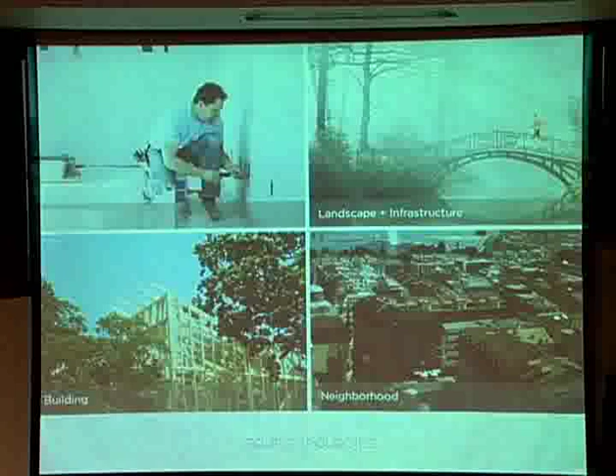Just like LEED, there are different versions of living buildings for different types of sites. Renovation is one - they encourage not just new buildings to go after this but renovations as well. Landscape and infrastructure, so not just buildings. New buildings, like what we're talking about tonight, and then neighborhoods as well. So they've got different allowances for different project types when necessary.

Beyond that, there are different zones, just like in LEED - different types of zones for this. There's natural habitat, rural agriculture, village or campus - it gets more urban as you go along. Depending on what type of project you are, you'll pick which zone you're actually in.

Another interesting part about the challenge - depending on the size of building you are, like in our case, we're a small school building next to a large church building that shades us most of the year, so we actually can't put solar panels on our little roof. We have to put it on the next building over because that's where the sun is. They allow you to scale jump to the next building if necessary to achieve net zero energy or water or any of the other petals.

So this is the first petal, which is site, and you'll see some similarities to LEED for those of you that know it. First of all, they want you to have limits to growth - it's obviously better to build on a gray field site or even a brown field site to reduce urban sprawl.

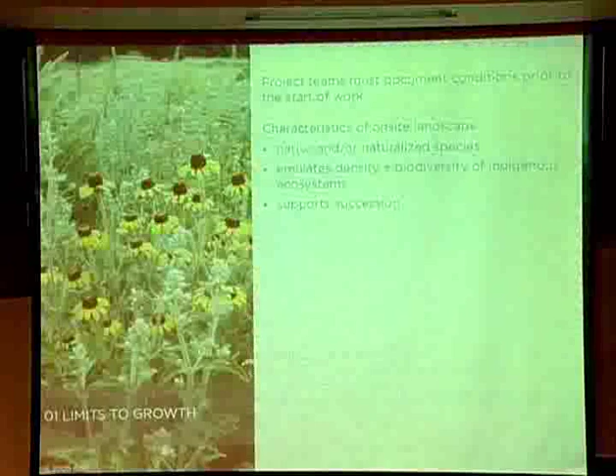Urban agriculture is one of the new credits for the 2.0, which is a really neat piece. A lot of up-and-coming sustainability people are talking about urban agriculture, which I know you guys do a lot of here in Missoula. It's great to see—certainly much better examples than we have in Seattle.

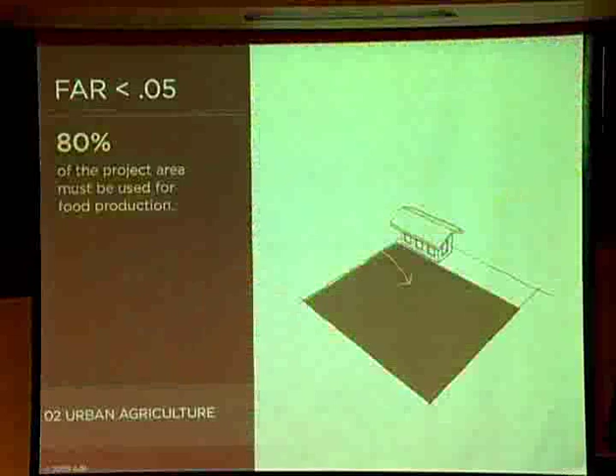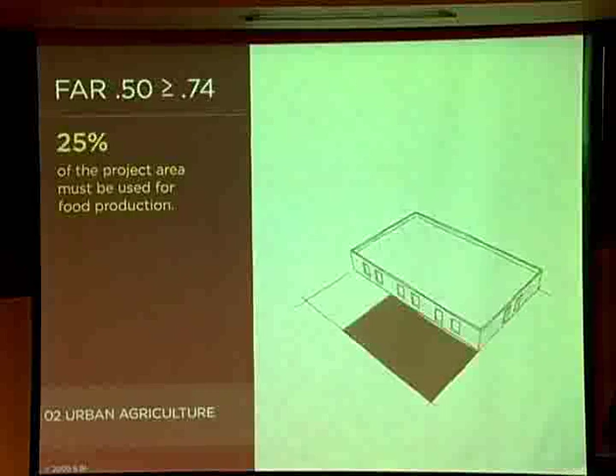For living buildings, they want each site to be able to produce its own food, based on the size of the building. As we click through some slides, you'll see it's based on your floor area ratio—the smaller the building, the more site you need for urban agriculture, and as your building gets bigger, you obviously have less space. So in urban zones, it's much harder to do.

But that's a nice piece to the challenge, taking on some sustainability aspects that LEED really doesn't touch on.

The third imperative under this petal is habitat exchange. Basically, for every hectare of land you build on, you have to offset that by protecting a hectare of land somewhere else—whether it's a wildlife preserve, native forest, or watershed. You're protecting the amount of land you're using in your project, which I think is unique and a nice feature of the challenge.

Another one is car-free living. This is basically promoting projects that are near public transportation, that promote pedestrian-friendly facades and streetscapes—just getting away from the need for the automobile.

They also will not allow you to have more parking than required by code, and if you can, they want you to change the code and actually reduce your parking—they want to see documentation that you've tried to do that.

This is one of the more exciting ones. The others are kind of familiar to you with LEED. This is the water petal, which is a fairly big one, has some difficulties in it, and it's actually a fairly simple piece to remember.

It's net zero water. That means all of the water used on your project has to be collected from rainwater—you're not allowed to use any city sources at all.

It also has another piece to it, ecological water flow—not only do you have to collect all of your water, but all the water used in the building has to be treated, and you can't really send it down the sewer to the city.

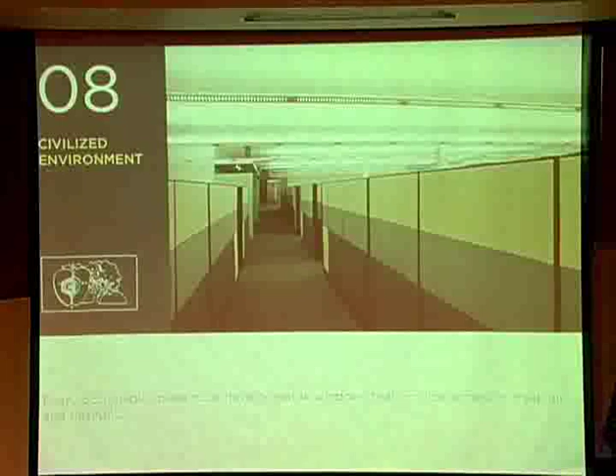Most projects in Europe trying to achieve this higher level of sustainability—almost everybody, for instance, in an office has access to an occupiable, or rather operable window, which can really change your productivity and your happiness and health at work or wherever you are.

Just to note, this is a bad example on the screen right now—it's not a good example. People look at that and say, that's not what we'd want to work in. So they're just showing you what not to do in this slide.

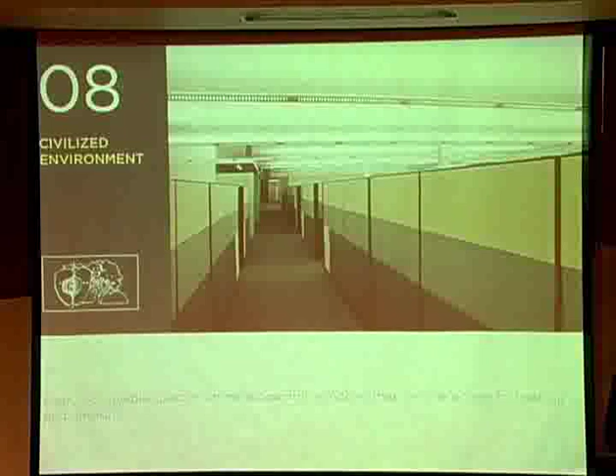So healthy air is another one too, where they're wanting you to promote indoor air quality. So this takes on things like having vestibules in your entry space, having walk-off mats, which is similar to LEED, and then also doing air quality testing.

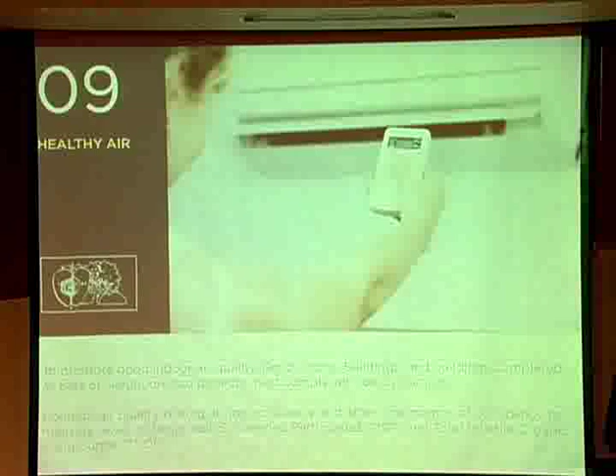Here's those things I just mentioned: meeting certain codes with ASHRAE systems, monitoring systems for carbon dioxide. So it's really similar to LEED with these portions here, they just go a little bit beyond.

This is another exciting one, I think, for us that we tried to embrace in our project. It's biophilia. That's where we're designing elements in the project to actually look back to nature for either their form or their function. That's something unique when you're trying to design a building, to think that way. So they give lots of examples of how you can do that: natural shapes and forms, trees and supports, animals, shells, eggs, sunlight, fire—just different things to think about in the design process to make your building more organic and respond more to nature.

So materials, this is a fairly interesting petal, and actually one of the more difficult things to challenge when you're first starting out on living buildings and learning about them. You think, oh, net zero energy, net zero water, that's really hard. How are we going to have buildings that do that? And what we found really, which we'll talk about later, is that it's fairly achievable. It's a goal that you can achieve yourself through engineering.

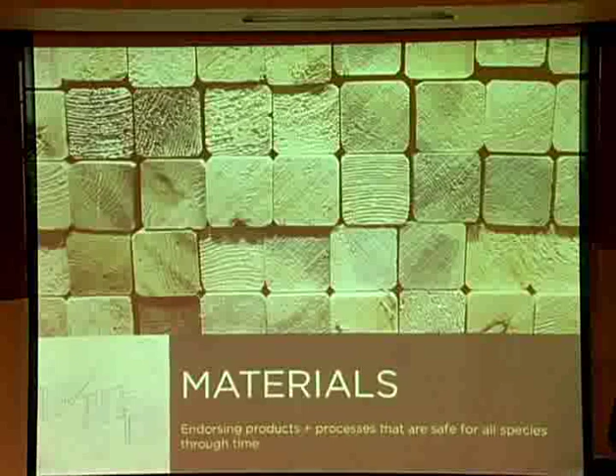So the team just kind of figures out the different strategies you're going to implement for that. Materials is quite a bit different because it's based on a lot of other people—it's based on the building industry, it's based on products, it's based on set standards for years and years in the world as we're trying to collect materials, and we'll kind of explain that here.

So the first part of the materials petal is the red list. I think this is a really great piece of the challenge here. The red list is basically this list of chemicals that you're not allowed to include in the building, and we will turn down the lights so you can see.

So this is the list. These are the things you can't include in the building, and you think maybe some of these are fairly easy. Lead, nobody's really adding that to buildings. But then you get into other things like PVC, for instance, and as you may know, PVC is basically in everything, and we'll kind of show you that later as well.

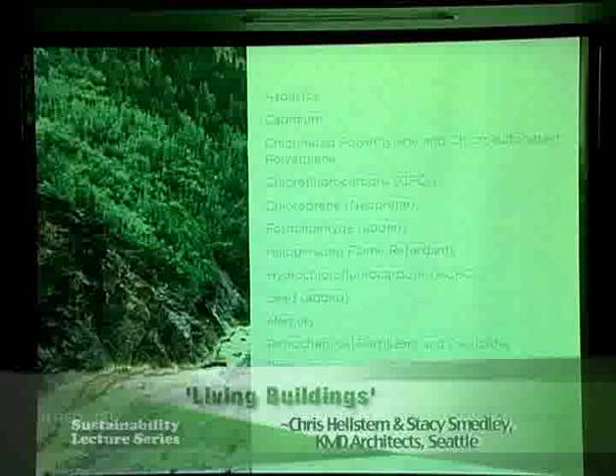It's just simple piping. Halogenated flame retardants sounds really fancy, but it's almost every kind of fireproofing that's in almost everything that's fire retardant, which we have to have. So that becomes really difficult to get past those things. CFCs, cadmium, asbestos—those are all things that are inherent in so many materials.

So as we go through our project, we're finding different materials to use, and what we have to do is actually contact all the manufacturers and determine what is in their product. You think that's fairly easy, they put that on their website, that sort of thing. Actually, it's quite difficult. Many of the manufacturers don't even know what's in their product, and that's a little bit scary, and I think kind of the next portion of sustainability where things are going is learning more about products and the chemicals we use and put in our buildings every day.

So as we go to these manufacturers, they're often finding they're having to go back to their chemists and look through to determine all the materials in their very simple products sometimes. Sometimes just gypsum board, sheetrock, has a variety of different materials in it that the manufacturers aren't even sure of, and they go through and start finding these really horrible chemicals in them. So it's definitely an important part of the challenge as we work through and try to find that out.

It's certainly presented a lot of roadblocks for us, particularly. As I mentioned, the industry kind of has to change as well. So for many years, people haven't really called out the industry on these chemicals. They just kind of use what's here. You pick a PVC pipe and you think we're not going to see it—it's buried and it doesn't really matter.

But the fact is, it gets into almost everything that you do in a daily life. So we found that it's definitely important to check through those.

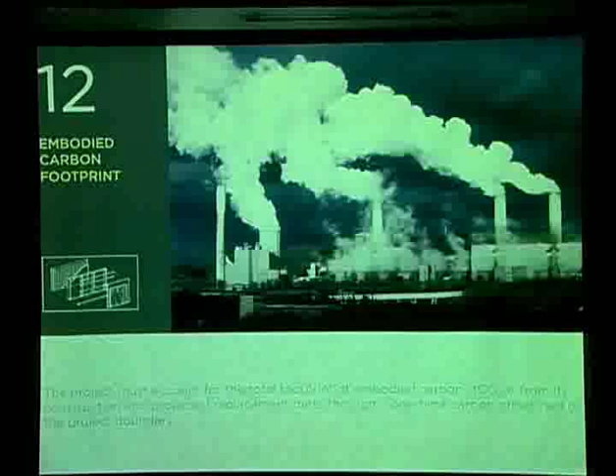Embodied carbon footprint - this one is fairly simple. You're basically just offsetting whatever building you build with carbon offsets. So you do an end-use calculation to determine the embodied energy in your project, and you just buy a one-time offset for that.

Responsible industry goes into a variety of things. One of the most talked about is FSC wood. How many of you know what FSC is? Quite a few of you. For the ones who don't, it's Forest Stewardship Council - sustainable practices in forestry. It's a body that certifies different timber organizations and determines how they clear cut the forest.

Hopefully they're not clear cutting it - the different sustainable practices they have, that they're not stripping away an entire forest, that they're keeping their practices in check as they harvest the timber. The wood that's harvested has to be tracked all the way from when it's a tree in the forest, as it's cut down, all the way to the end use as it comes on site for a building. They attach a certification number so that piece of lumber can be tracked all the way through. It's a really great certification body, and I'll put in a plug for them here.

I think you may hear other things about Sustainable Forestry Initiative, SFI, as kind of an alternative to that. If you do some research, you find out that SFI is not really a comparable system to FSC. FSC is certainly the gold standard in certifying wood and ensuring sustainable practices. So all wood on the project must be FSC certified.

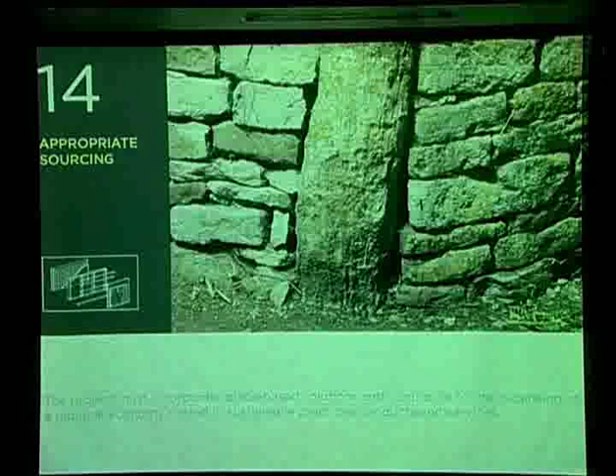The next big one under materials is appropriate sourcing, and LEED has something similar where you have to source certain materials within certain radiuses based on what they are. Living Building Challenge has the same type of thing - it's a little bit more challenging and stringent. I think this is a good list that shows you - it separates by specification division, which is how we organize our products when designing a project. The heavier the product or material, the closer it has to come from.

So things like concrete have to be within 500 kilometers. It's tracking not only the manufacturing plant, but where every piece of that product or material is coming from or extracted from as well. So if you have a metal door, you have to know where it's actually manufactured, but also where that metal is extracted from. That has to fall within these radiuses, which can be a challenge for certain projects depending on where they are. It's all going back to trying to limit how much fuel and other resources are used to get materials to your site. It's been a challenge for us too, because some manufacturers don't actually know where every part of their product is coming from, in terms of paint or metal or things like that.

And then conservation and reuse. This is also similar to a LEED credit, where we're actually diverting 95 to 100% of all of our construction waste on the site to recycling facilities. One difference with the Living Building Challenge is they won't let us send it to places where they're going to burn those materials, because they don't want the pollution to happen. So it has to go somewhere where it will be recycled into another product of some kind.

Yeah, this is a more stringent requirement than LEED. It goes well beyond. Even in Seattle, this is hard to achieve, and we'll talk a bit about that.

This is kind of a unique piece to the challenge, the equity petal, just looking more at an equitable environment and that buildings are more accessible for everyone. So it's not just the idea that you can build this grand multi-million-dollar huge living building that's really only used by a few people and maybe doesn't help the community in a certain way. These petals help to ensure that.

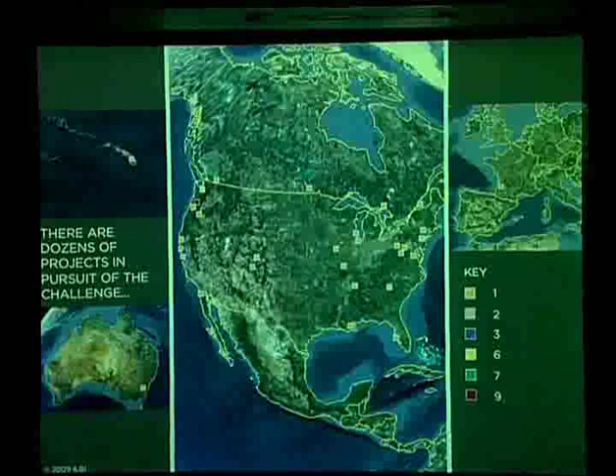So those are the 20 imperatives—that's the overview of the challenge itself. Now we'll talk a little more about what's happening with it. This shows all the projects currently in pursuit. There's quite a few—I think 70 are currently in pursuit of the Living Building Challenge right now, and it's something that's expanding all over the world. We get that question a lot. You can see it's moving to Europe, Australia, Hawaii, and parts of Asia as well, so it's really starting to get some wide response.

We'll flip through a brief view of a few projects—these are the ones that have actually been certified. So this is the Tyson Living Learning Center, at Washington University campus in St. Louis, and the Omega Center for Sustainability, in New York. These are the only current living buildings in the world as of two weeks ago.

And this is the residence at the top in Victoria, BC. So that's the first residence that's made it too. This is the next one to come online here. It's the Hawaii Preparatory Academy. They're going to be number 4.

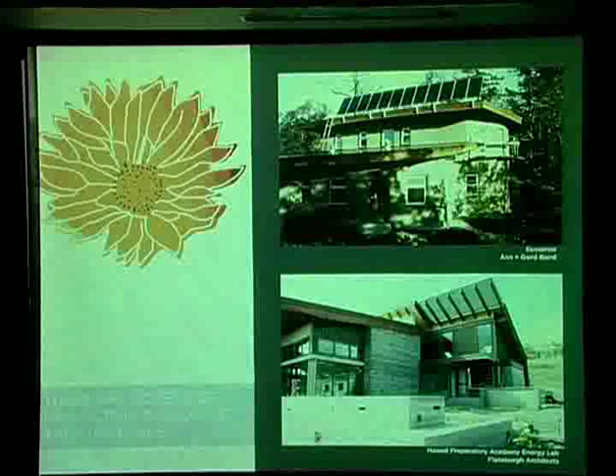It's kind of an interesting project as they were obviously isolated out there, so the appropriate sourcing had to be stretched for them a bit. Not a lot of resources in Hawaii, so they had to take some liberties there with that. But they've met all the other petals, and we'll soon see the certification for that one.

A few others in design, just some different renderings all over the world of other projects that are happening. These are all at various stages, some in construction, some still in design.

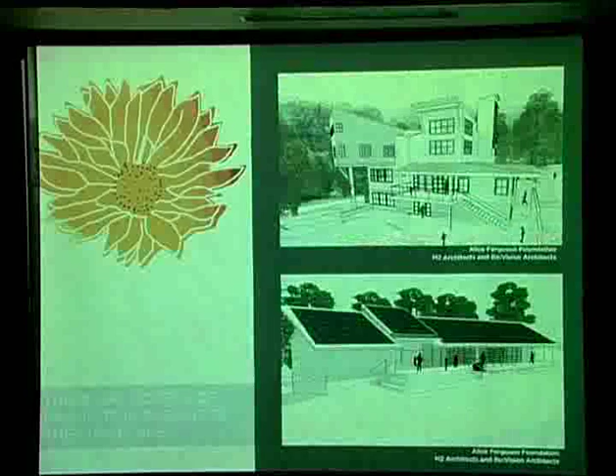So we didn't mention at the beginning, it is similar to LEED, where there's a governing body for it. It's the International Living Building Institute, and this was actually developed from the Cascadia Region Green Building Council. There's a lot of different acronyms and names, but this is the group that is basically one of the founding chapters of LEED, of the U.S. Green Building Council, and the CEO put this together and created this challenge and kind of brought it with him and created this whole organization.

You can go online, and there's lots of free areas to access. You can download copies of the challenge that we presented here, and you can learn more about it. There's also other free resources on there. You can see some different white papers and other studies that have been done about it.

Just a brief overview of the Bertschi School—a couple of photos of their LEED Gold piece here. You can see they've been way ahead of the curve; I think this was finished in 2006. They already had solar panels and cisterns on site collecting rainwater, so they'd already done great. It's about 230 students there, and it's a great school with a lot of sustainability built into their curriculum for years and years.

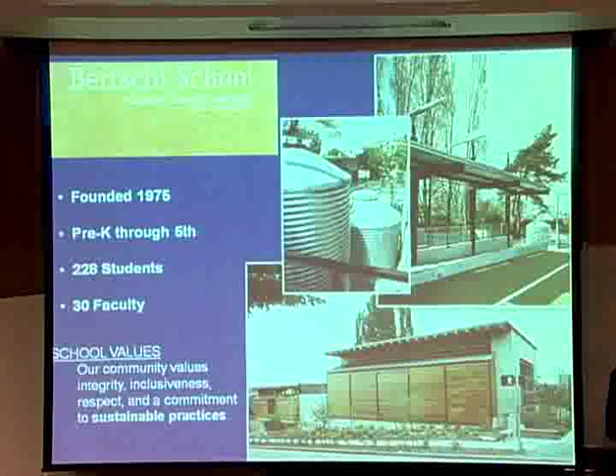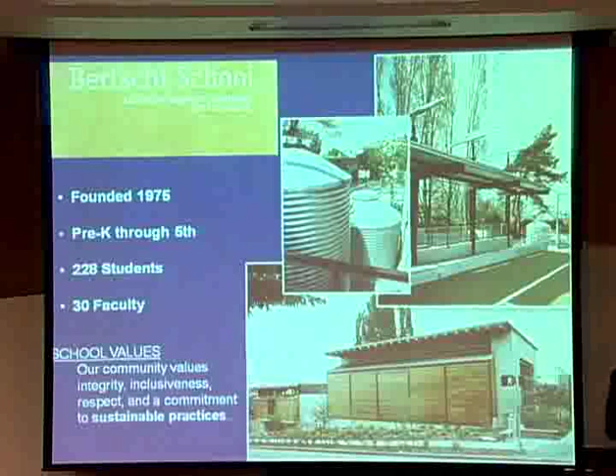You can see that last statement is part of their mission statement—sustainability is built right into it. They've been teaching the kids from pre-K through 5th grade different sustainable practices. Each grade has a certain unit they study—for example, 3rd grade studies water for the year, 4th grade studies energy. They carry it throughout their curriculum and practice it too, with local sustainable farm food provided, among other things. It's a great school, a great client for us—it really worked out perfectly.

Now we'll start with the design, a little bit of the process. The fun part about doing a project for a school that already has sustainability in their curriculum, for this age group, is that the kids are really our client. We got to sit down with them and say, hi, we're going to do a living science building for you—what does that mean to you guys? What do you want a living science building to be? The kids came up with a wish list they went through with us. These are actual quotes from them—I'll read a couple because they're pretty great.

I think a good example is - they wanted a bamboo type fountain outside where they could go to relieve their stress, being elementary school kids. They wanted something like Falling Water, Frank Lloyd Wright, where the water is all exposed. They wanted a river running through their classroom where they could take the tiles up and test the water to see what was in it. They wanted windows in the ceiling so they could see the sky, and a living wall where things would always be growing. So off that list, we were able to incorporate all of these things, and they really drove the design, which was pretty exciting for us.

They wouldn't do the work though. I don't know why, you couldn't get them there.

Too small. So this is a video from Living Future that we put together, basically telling our story a little bit - a couple minutes. You can see some interviews from the kids.

Kids are super cute, right? Yeah, that's pretty good. We're always impressed every time we go there. They're quite knowledgeable - they've learned something in their classes about the living building, and they're saying words like ethnobotanical in 3rd and 4th grade. So we're really impressed by them. We're a little afraid for our jobs, actually. They seem to know what they're doing.

So beyond the kid portion, which is also very exciting, we have the restorative design collective portion, which is also very exciting. It's been pretty awesome to have this group of people so committed, donating their time and services with us. We did a series of charrettes, which at the beginning of the project means we get together in a room and brainstorm how we're going to achieve these 20 things we have to achieve. At points there were 30 people in the room doing that. So just the process of collaboration was pretty inspiring.

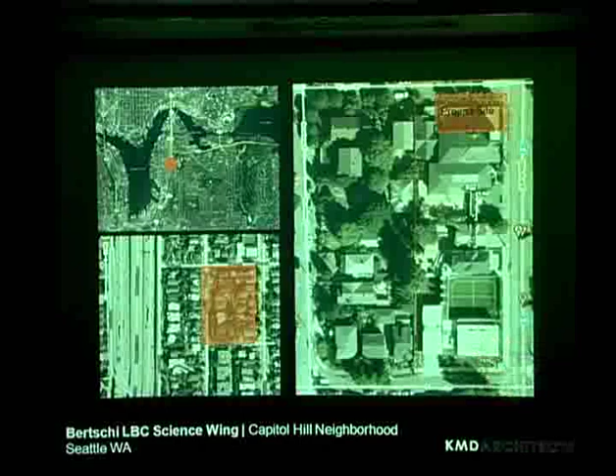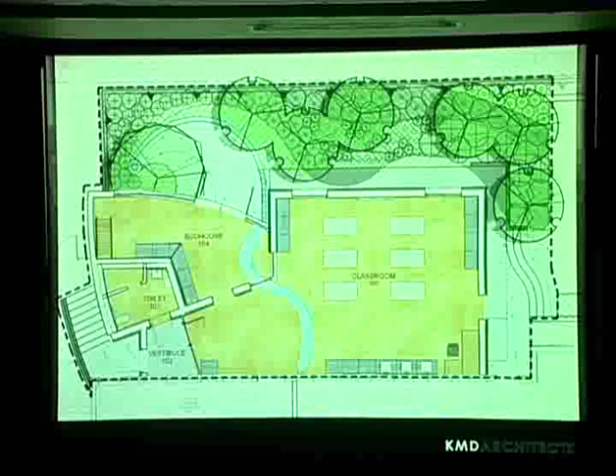Just a roof plan. You can see a little bit of the biophilic design that the landscape architects carried through here, kind of making the shell forms in the roof. You'll actually see those patterns in the moss mat roof system that we have up there.

The building is viewed from above. You see the church back there that's been converted into classrooms as well, so there's a couple levels of classrooms up there, so the students will have a great close-up view of the green roof system and then be able to look right down and actually see this.

Typically as architects we draw fun looking things in plans, but not everybody gets to see them because you're only looking at it from bird's eye view, so this is actually one that'll be worthwhile. And you can see the rain garden area that was just out to the north of the site.

A little bit of maybe an interesting video we'll kind of talk through. This is just kind of the start of the groundbreaking as they are beginning to put in the first irrigation and potable water cisterns. Just kind of fun to see for those of you that don't get to see construction very much. We watch it all the time, but maybe that's not so great.

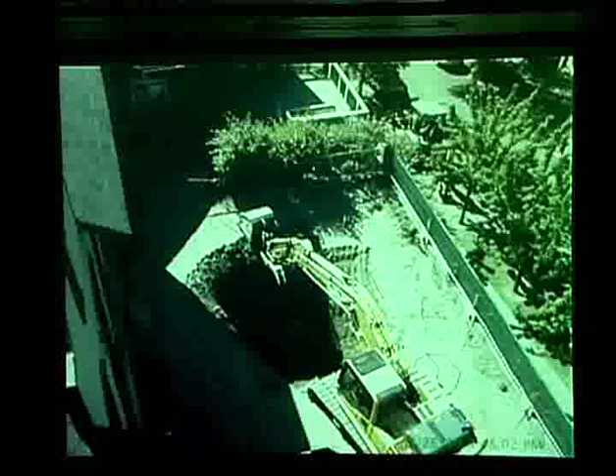So you're seeing here they're just digging for the potable water cistern, which is placed in the eco house for us. It's kind of in the floor.

So you'll see this is a time lapse. We have a great webcam that the school has put up so we can monitor construction and see when people are taking really long lunch breaks, which they don't like, but you can see them kind of shoring up the hole here, and then they drop in these pre-manufactured cisterns that'll hold the water for us.

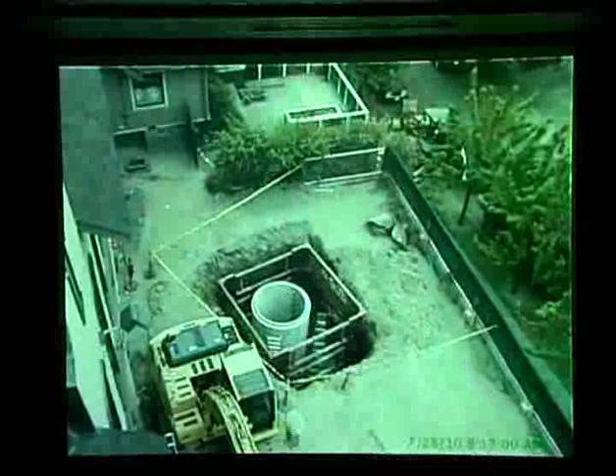So we have two of these. There's the potable water cistern here, which is being installed, and there's also one that's out in the garden away from the building. That's the irrigation cistern for all the landscaping. As they kind of drop it in, it's just fun to see. We won't bore you to death with that.

And there it is. It's got a lid. It's a traditional manhole type cover that you normally see in the streets.

Does it want to advance?

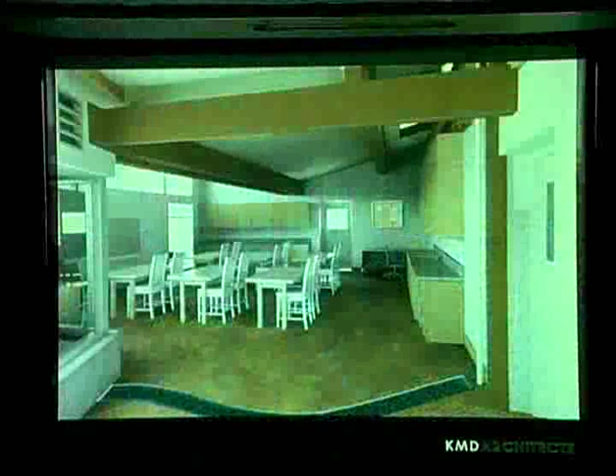And just kind of a reminder of what it looked like. A couple of interior renderings here. Looking into the classroom, the rectilinear space there, you can see down at the bottom of the picture there's the runnel. The eco house is off to the left.

You can just see the glass wall. This is just looking right back that other way, in the far corner is where we were just standing looking back. So another shot of the classroom.

We have exposed glulam beams that run up in the top for the ceiling structure, so that'll be all exposed for everyone.

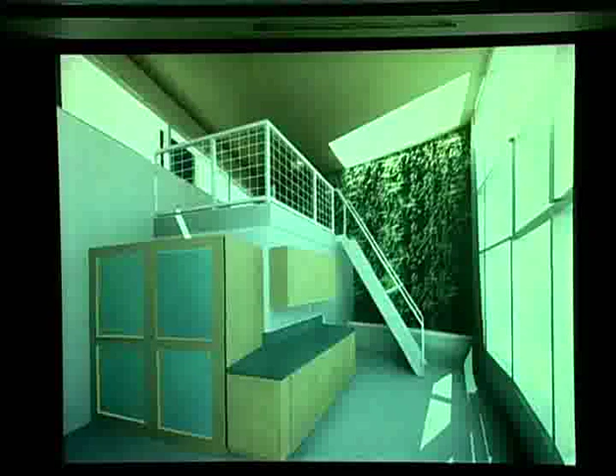This is a rendering of the Eco House. We have a bit of a mezzanine structure up there. The kids can kind of go up and do different gravity experiments and things, and it's just a nice place for them to go. You know, kids like to climb up things and have little areas to go in. They can do that and get right along this green wall here, which you see in the distance in the back there, and we'll talk a bit about that too.

Okay, so we'll start with the site. The site features are actually pretty exciting. The urban agriculture portion, our landscape architects and our urban ecologist actually did a great job researching native plants that were used by Native Americans in our area and what they were used for.

So beyond just plants that are going to be harvested for food consumption, there's things like berries that are going to be used for dyes that they can actually use in their art class, ferns they're going to use to do basket weaving, and also things like jam that they can do as part of the science curriculum.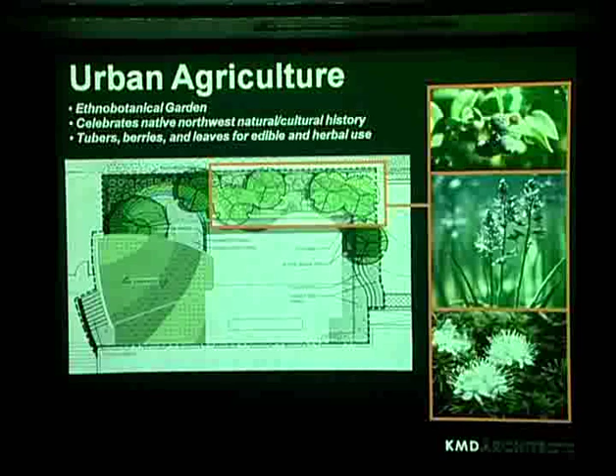And again, Chris mentioned the green roof. We are in the shade most of the time because we're in the shadow of that church building, so a moss mat roof seems to fit pretty well in our instance. It's also going to be the first moss mat roof in the Northwest, so it's a case study just to see how that goes as well.

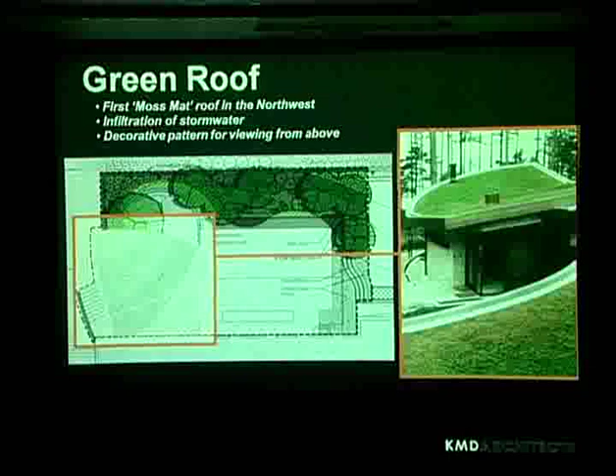Different kinds of mosses will have the different colors that you're seeing in that picture. It's the first moss mat people are actually paying for on a roof in Seattle. If you've been there, you've seen it. That's a really good point.

And then rain gardens as well. Our water system, which we'll go through in detail in a minute, ends with a rain garden that's adjacent to the exterior runnel, where any water that overflows out of the cisterns will go and actually be absorbed on site.

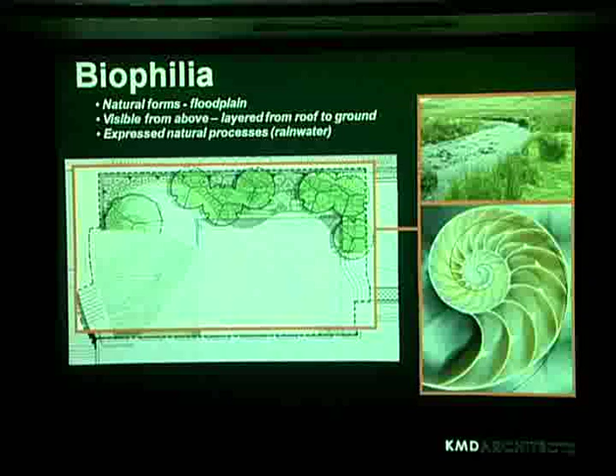And then again, the biophilia. I think it's more obvious now that you've seen the plan how we're incorporating that into the site, the shell shape. Meandering rivers too, we're keeping that in there, so it's just kind of really natural, calming, organic shapes.

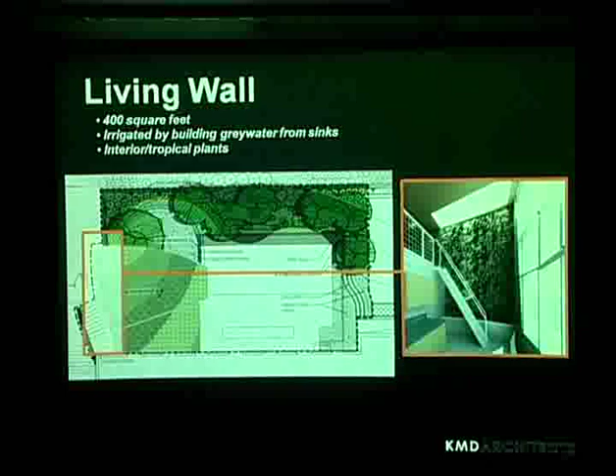And then the living wall, again, is another exciting piece, and this is something the kids are super excited about. It's already being grown right now. It'll be installed in a few weeks, and basically it's treating all of our gray water. So any water that's coming from our sinks is going up into that wall and being soaked up by those plants.

We had to do a variety of studies for this living wall. You just can't plant a wall of plants inside and expect them to grow, especially for these that are tropical plants. They have to uptake a lot of water. We're having them uptake about 55 gallons of our gray water a day, so in order to clean it.

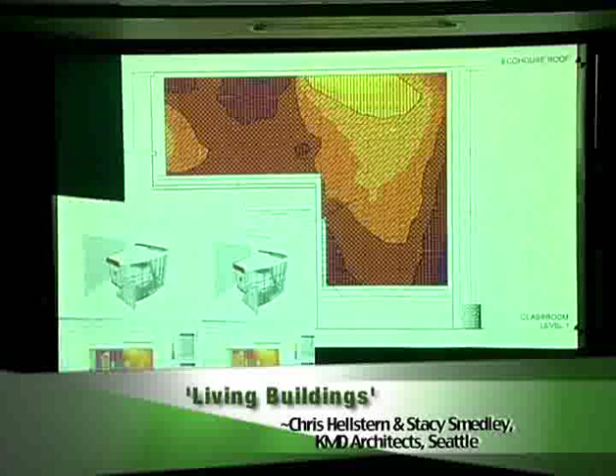And obviously plants need sunlight energy in order to perform, so we've had to do a lot of really complicated daylighting studies in order to get this to happen. And truthfully, we're not even really sure how well it's going to work. It's kind of a new thing, so we've put a lot of different models to it and had a lot of different engineers working on it to see if this is something that can be done.

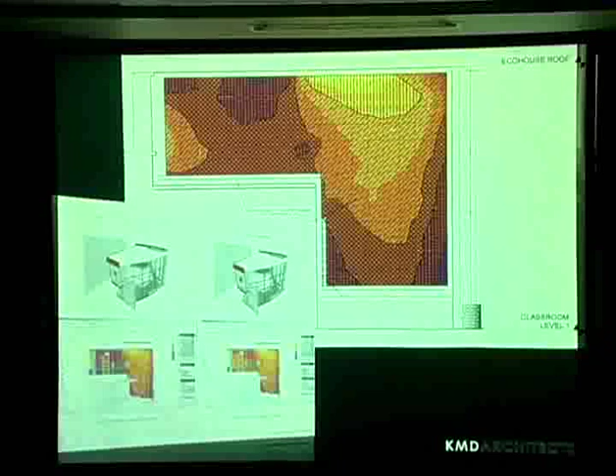Right now we've got, as you can see from this lighting study, we've got quite a bit of light coming in naturally. You can see the bright yellow lighter colors is a skylight we have up there, and the darker is the less amount of light. We're having to add a couple of actual electric lights to it as well.

As Stacy mentioned, they're already growing, so as soon as they install them, they'll be ready to go. It'll be a fully mature wall, so you don't have to wait for it to sprout up. It'll look nice right away.

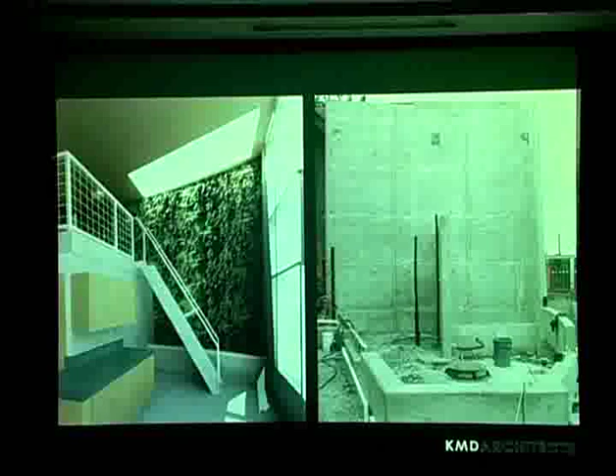So the water piece, we talked about this a bit, potable and treatment. We'll kind of go through it.

So again, there's the two imperatives with the Living Building Challenge, the potable side and the gray water side. First we'll talk about how we're collecting the water.

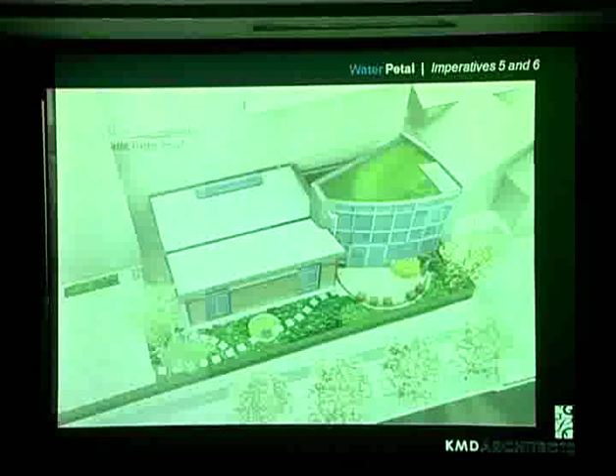The rainwater falls on our roofs. We're actually scale jumping in this instance too, so we're collecting the roof off of the church building too, to get enough water for what we need.

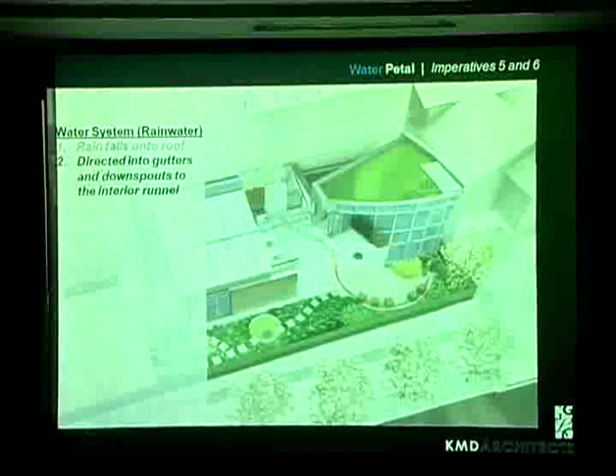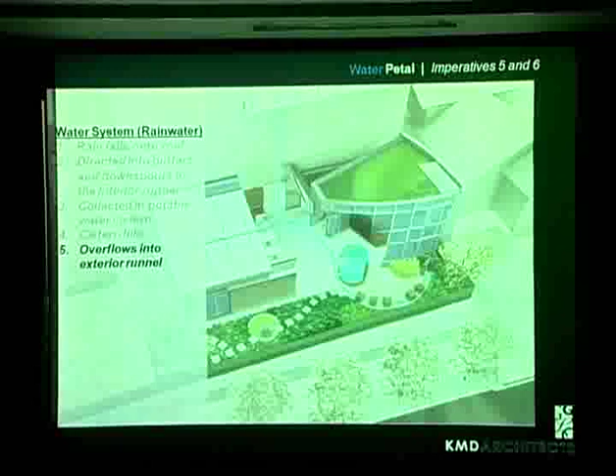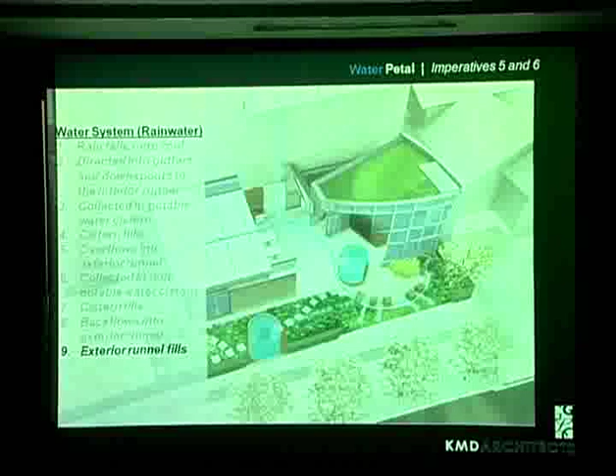It's collected in the potable cistern, which you saw being installed under the Eco House. The cistern fills up, overflows into the exterior runnel, then goes into the non-potable cistern. That cistern fills up, goes back into the exterior runnel, and once that's filled up, it overflows into the rain garden.

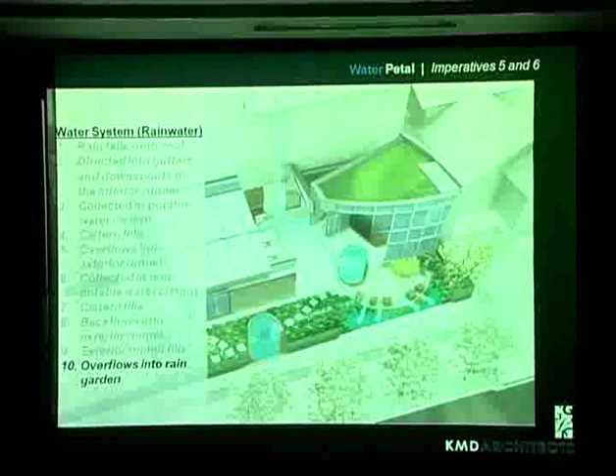We went through a series of designs to figure out a way to make all of this really visible to the kids, so they'll be able to watch that runnel fill up and overflow and see the process and know how much water is actually being contained that way. It basically illustrates the water cycle for them so they can follow all the steps.

So then we have the second piece, which is the ecological water flow we mentioned in the Living Building Challenge piece. This is our gray water treatment.

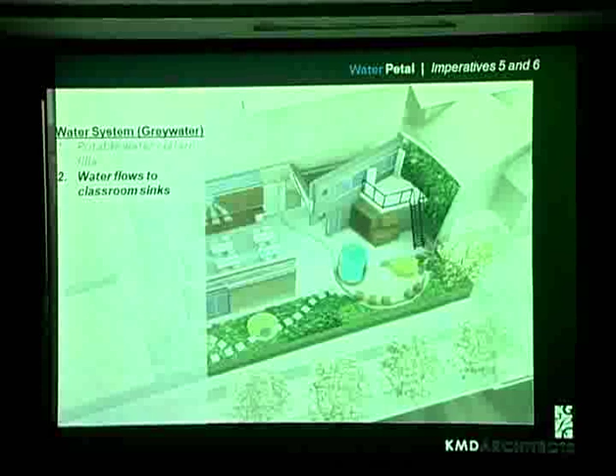Our potable water cistern is filled from the water we've collected from rain. Then the water is pumped into our classroom sinks. We have 3 in there used for general science purposes, and we also have a restroom with a lavatory sink. So 4 sinks in the entire building that'll be supplied with this water.

The gray water flows back from those sinks that have been used into a gray water holding tank we have in the building, and that's a separate tank you'll see here in a moment that filters out the water.

From there, it goes up into the living wall, which we looked at, and it's percolated down through it. The living wall is created by a tray system, so all the plants are in plastic trays mounted on the wall, and the water is trickled and runs back through behind them, into their soil, and that's how it'll be dripped down.

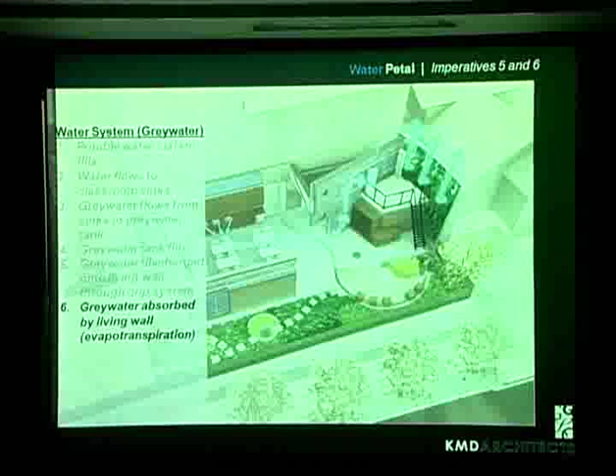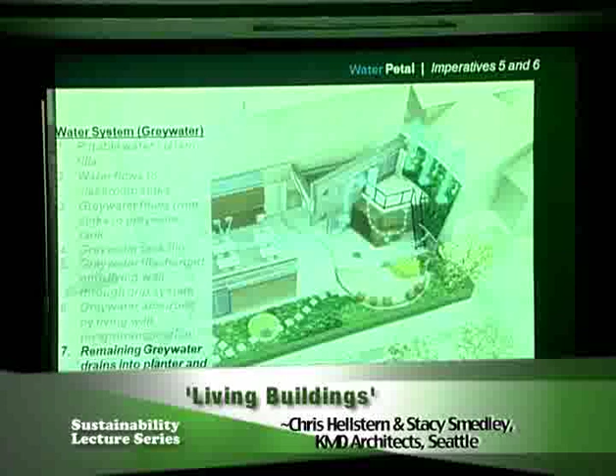The gray water is absorbed and does its evapotranspiration work. Remaining gray water falls into a planter, and anything that doesn't make it evapotranspirates and recirculates, and the process repeats again until that water has fully evaporated.

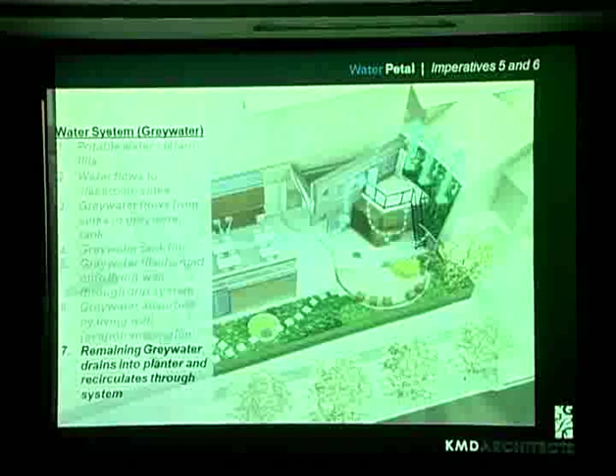This is the gray water tank that'll help filter the water first. You can see the process there - it's just a series of filters and pumps that help clean the water, and then it moves on out into the living wall.

Interestingly, this is one of the pieces we talked about with materials, how PVC pipe is not allowed. This is one of the manufacturers that has PVC included in this device to transport the water - it's the common pipe type that's used. We told them it doesn't work for us and we can't use it. The manufacturer has actually decided to change their process and go to pipes that are not PVC. Something different to embrace the challenge - it's really great.

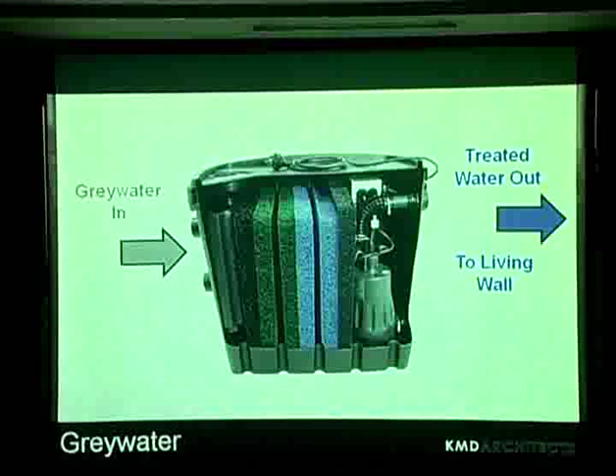For our potable treatment, we haven't talked a lot about this yet, but obviously you'll need drinking water in this building. So ours runs through a complex system of UV filters, ultraviolet lights, and carbon filters to help clean the water. The caveat is right now the Department of Health, King County, and the state don't allow you to treat your own water.

So what we're doing is installing the system, having it all built and ready to go, and basically just have a valve we can switch over when they allow us to do that, which we think is coming fairly soon. There's a lot of great meetings happening with the city, and they're really open to things so far and looking at how this can be accomplished. They're really concerned on a Department of Health aspect, and we don't blame them for that. They want to ensure people are treating water to an appropriate Class A standard.

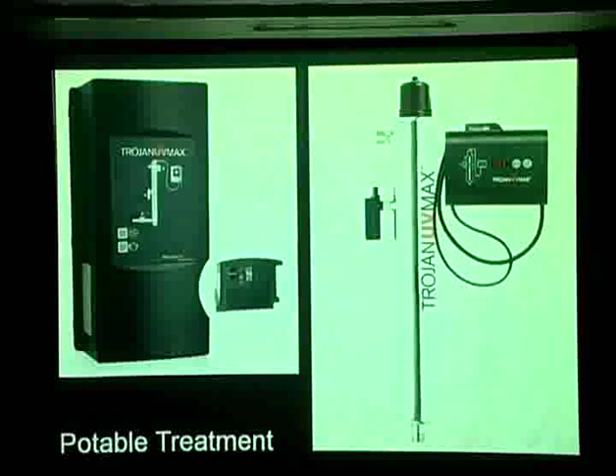Once they realize people can do this with these very advanced systems that treat it as good as or better than your city water in many cases, we think that'll change. So that'll be a great piece too. These are all exposed pieces on the walls in the Eco House for the children to see as well. So energy is the next one.

Again, when we were in the design phase, one of the first things we did was try to figure out how to reduce the amount of energy we actually needed, so we didn't have to create a larger system than we needed in terms of solar energy. So these are some of the strategies we went through, and the biggest one is actually occupant education.

They plug in a lot of things like microscopes and leave lights on. So just having the teacher and students realize let's turn things off when we don't need the extra light, or at the end of the day let's turn off a switch so everything in the building is actually shut off overnight so we're not using any energy.

Some of the negative press you probably heard with LEED buildings is true - people build these really environmentally friendly buildings according to LEED, but then it turns out they actually use more energy than typical buildings. It's kind of the same thought as when people buy a low-fat bag of cookies but then eat the whole bag - it's not quite helping.

So people have to train themselves to not leave these efficient lights on and perform appropriately in the building. It's a lot about occupant education - that's really a huge factor in all of green building, not just for energy, but for water use and everything.

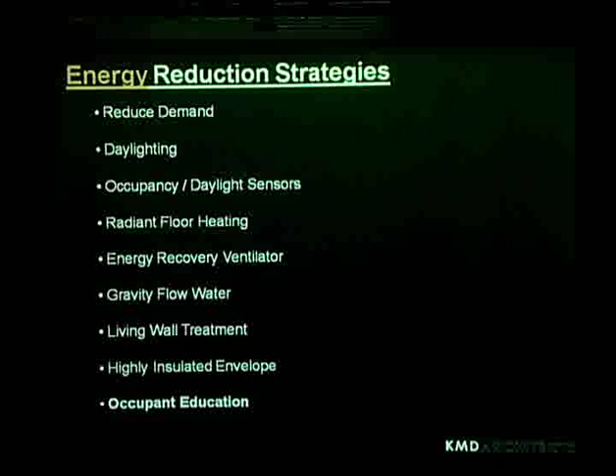So our healthy indoor environment has a variety of these strategies. We talked about daylighting as one of our factors. We had some daylighting modelers in Seattle take a look at this, and we're able to meet quite a bit higher than the LEED for Schools rating of the amount of foot candles needed for a daylit school. So we have quite a bit of nice light. It's all from the north, so we don't really have to worry about any overheating and extra solar gain that we don't need. So it's worked out quite well.

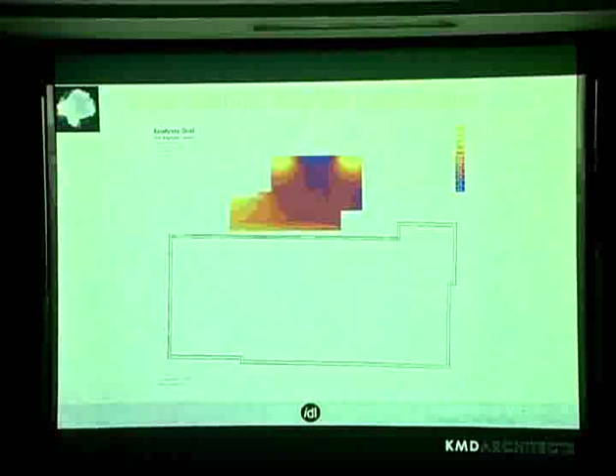A couple of the strategies we're using also for that - just a skylight traditional system there, and then Solatubes, which you may have seen, more as an educational piece to get light into some of the areas that are a little bit more tricky to have skylights in.

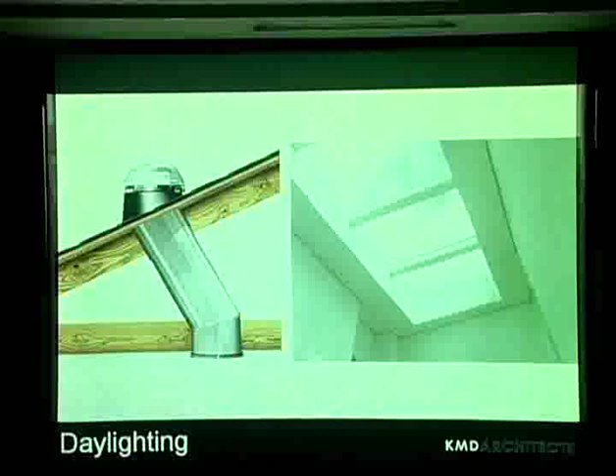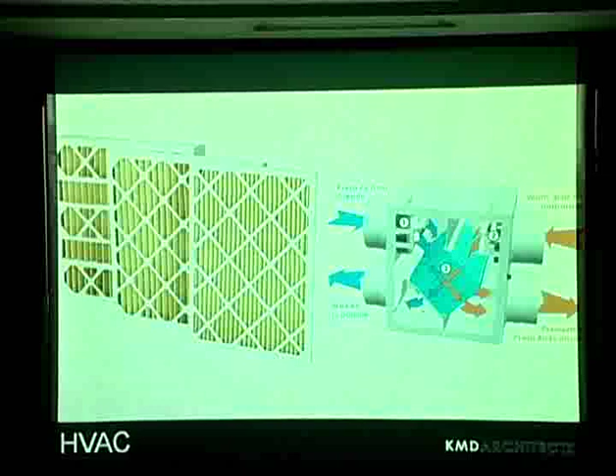We also have a good system of HVAC, heating, ventilation, air conditioning. We have what's called an ERV in our project, an energy recovery ventilator. What it does is help recapture some of the heat that's lost in a traditional building, recycling and recirculating the heat produced instead of ejecting it outside as a complete waste loss. We also have a variety of high efficiency filters, really fine filtered things to clean the air.

So I think just quickly I'll back up and touch on the waste piece, which was interesting for our project. Seattle has great waste stream management, really able to handle a lot of building recycling, can typically handle the LEED requirements, which are pretty high, 90 to 95%, no problem. But for living building, we have to go beyond that and go to 100%. And these are the most advanced plants in the country in some instances, and they had trouble meeting this.

They've actually done a great job of deciding to completely separately sort our building's materials once it arrives on their site, so they're keeping it separate from the waste stream and individually breaking out pieces for us. Because what they do, as Stacy mentioned, is they like to send some of the waste to farms and burn it as fuel, and that is not really what the Living Building Challenge allows, as we talked about - no emissions. So they're separately dealing with that, and that's a hard thing to meet even in Seattle, so kind of an interesting piece.

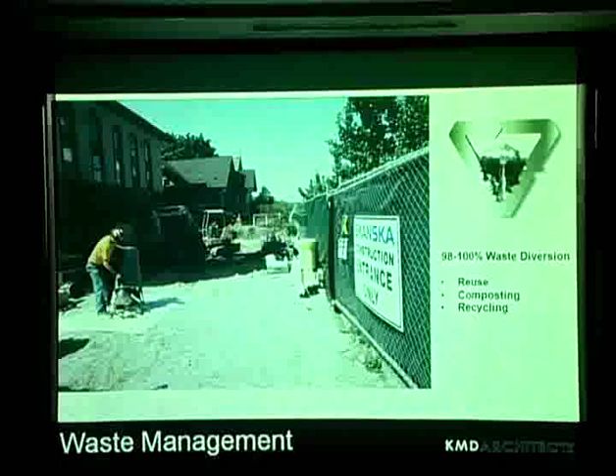The industry needs to be educated on this to try to remove that, because they're really stuck on PVC. It's easy to use, easy to make, but as you see, it causes a lot of problems, and it's around us every day. So that's part of the Living Building Challenge, is to remove this.

And you guys can partake in this too yourselves as you buy things in the store. Check and see if it's PVC. When you get a shower curtain, for example, make sure you're not getting a PVC one, or a variety of other things. I'm sure a lot of the parents in the room already pay attention to the toys and things - that's an easy one, but it's in a lot of things. So you can kind of take a look at that one yourself.

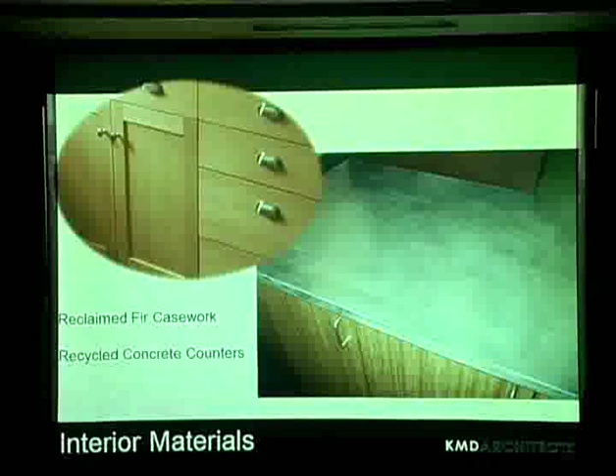The fir casework—we started out with bamboo casework in the beginning, because that's obviously a really sustainable material. Everybody wants to use bamboo, but what we found out is that it doesn't meet the sourcing requirement because it's all grown in China. Apparently there are about 140 species of bamboo, and the ones used for architectural strength are all in China, not expected to be in the U.S. for another 10 years or so. So we switched to fir.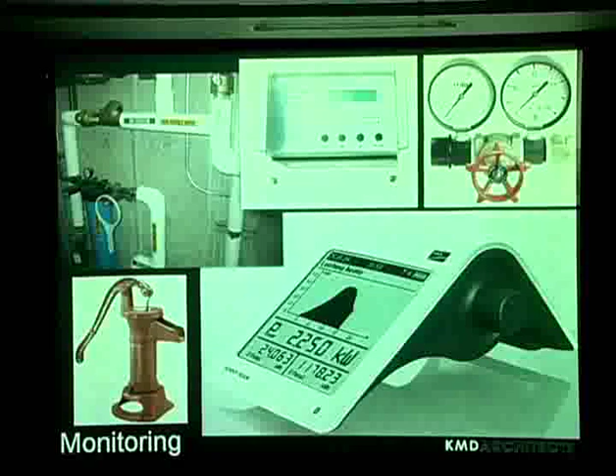So this is just to teach the kids that when you turn on your faucet, there's a lot more to water than it just coming out and being readily available to you. A lot goes into getting clean drinking water. Most of the people on the planet don't have it—I think 3 billion people are within a 3 hour walk or so of clean water, which is just an amazing statistic. In America, we're so used to just flipping on the faucet for anything. So this teaches the kids that it takes a little bit of work and to be a little more cautious with the water they use.

We also have some art in the building that's been provided. We'll have local plants cast into the concrete for them to see, which helps with their different studies. Same with salmon—we had a local artist produce the 5 species of salmon for the kids, which will be cast into the floor. That's one of their main studies, salmon; they do quite a large portion on that. They actually go out to one of the spawning areas in the city and watch the runs, taking quite a lesson on it.

And again, this is just a reminder before we look at some construction photos of why we're really doing it. It's all for these guys, and they're going to be graduating from high school in 2018, and they're going to grow up thinking that this is just the way things should be, and that's pretty inspiring for us.

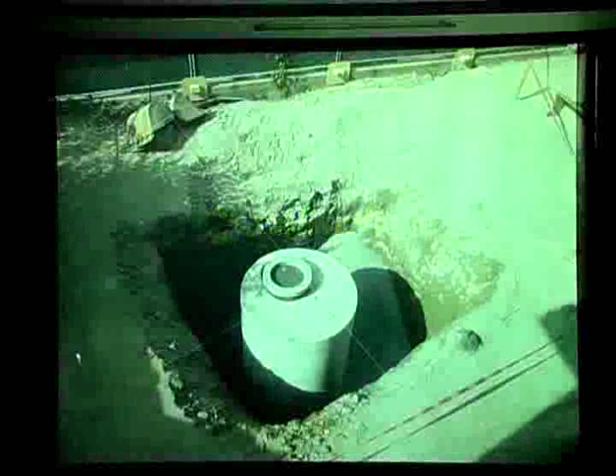This is kind of the last portion, just a few construction photos. We'll kind of go through the process here, theoretically in order. So this is the installation of the cistern, as you saw. Very tight site, as you can see, so they tried not to keep the big equipment in there for very long.

The Eco House just starting to be formed here. The footings being poured. You can see in the back, this is that big curving wall that the green wall will be held on, the concrete wall. This is it cast.

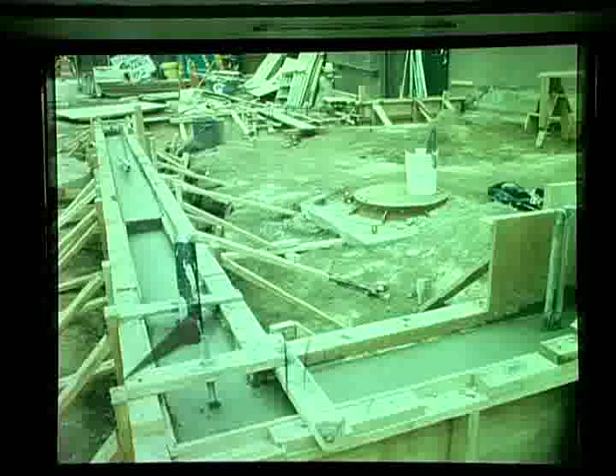So some more work as they're beginning to pour some of the other footings and stem walls that are around the building that'll hold up our wood-framed construction. A close-up of those walls - this is just the base wall, and all the wood framing will sit on top of these.

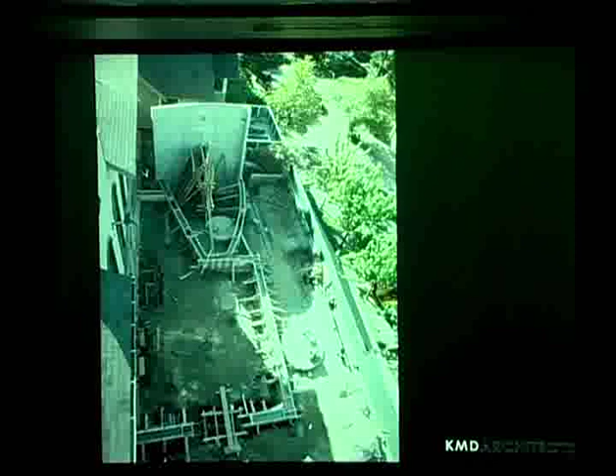An overall view. It's a really pretty site. They have a great view up over, if you know Seattle, Lake Union, and also down you can see the Olympics, and just a really great spot there.

Sometimes the kids watch us. They poke their heads out and get to see the construction up close, so that's really great.

Got another progress shot as things are moving along, more walls being cast, starting to fill in the foundation area. This is the beginning of the slab pour, so we insulated under the slab for extra insulation. You can see that's the bright silver that's down there as they put in the rebar.

So we talked a little bit about the conduit issue, the galvanized conduit we weren't allowed to use but the city required. What we were able to work out with the Living Building Challenge is that the dangers of these toxins in the galvanizing is that they can leach off into the water and ground source area. So what we did is we encased them in our concrete slab, so that encapsulated all the chemicals in there so that they wouldn't be in contact with the earth.

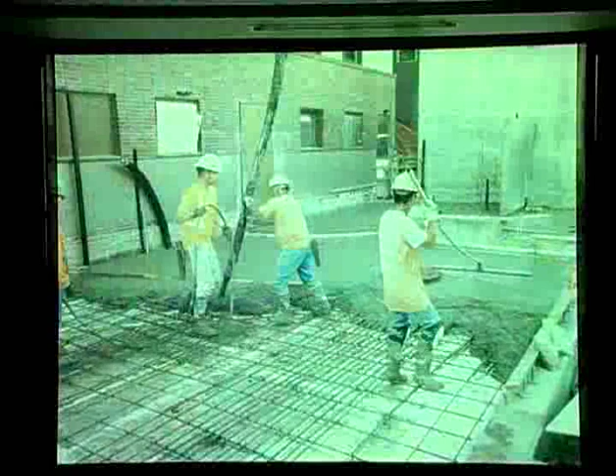As we're beginning to pour the slab - we actually have two slabs in our project. It's a structural slab first, about a 4-inch slab. Then on top of that, there's a 3-inch topping slab, which the radiant flooring system is included in that.

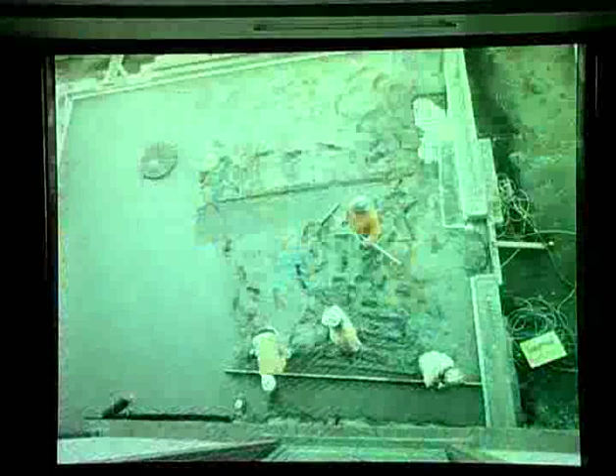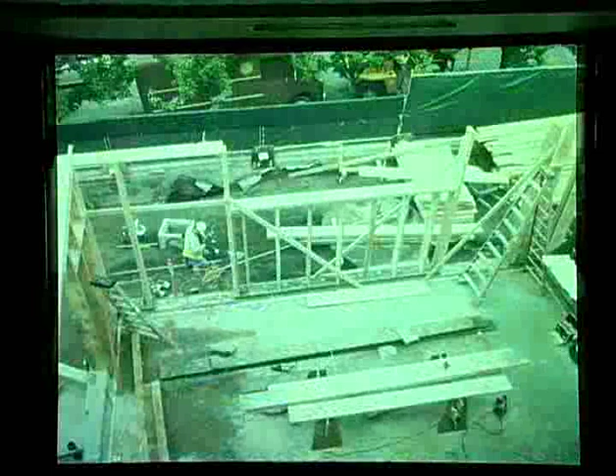Framing has started. Our FSC framing, our 2x12 walls, very thick, so we can have a lot of insulation in them. We have about R40, R42 for our walls, the resistance. So it's really highly insulated.

Getting to sheathe and framing is continuing on. This is about just a couple days ago. You can see down there in the bottom corner, these panels are our SIPS panels, which is the roof.

For those of you that may or may not know about SIPS panels, it's a structural insulated panel system. So what it is, 2 sheets of basically like a plywood, and then in between that is the white, which is the insulation piece. This is an all completely structural system. So instead of putting in the traditional beams and trusses first and then laying on different layers for the roof, it's all in one piece. It's a lot more economical that way.

It comes to the site already pre-fit to our size, so they're not cutting things and wasting, and the insulation is in there as well. It lets us get a much higher insulation value for the roof too - we're up about R60 for the roof.

See some shots on the inside here. This will look familiar to a rendering, almost. That one, maybe, kind of, maybe not. Same thing on the other side.

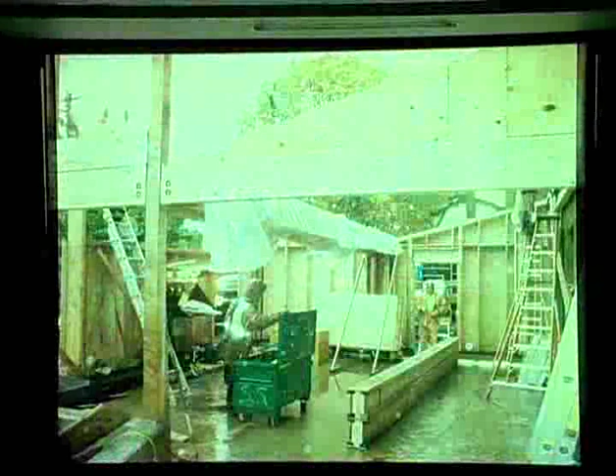You see our glulam beams that are exposed. So these are pre-engineered beams as well. They've been sized and built off-site specifically, so again, there's no cutting and waste of material.

We've tried wherever possible to expose the materials we're using. So in terms of the SIPS panels, that plywood's going to be the finished roofing surface. So when the kids are in the space, they can actually see the materials we use to construct the building instead of us covering it up with something else.

More shots here, from the Eco House area, looking back. You can see it's a much higher space. It's the top of the Eco House, the glulam beams. This is what they see from the classroom above.

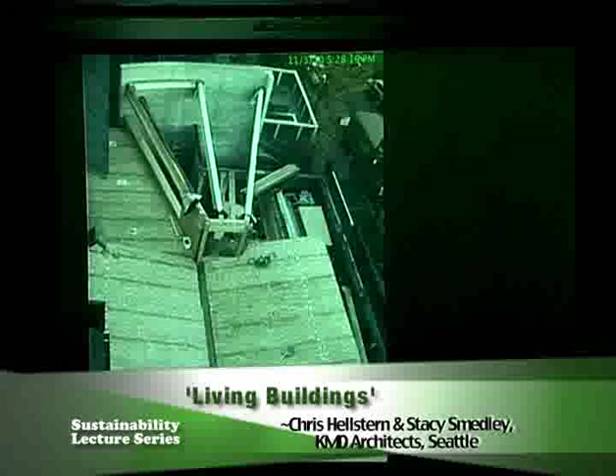This is the most recent picture we pulled off about half an hour ago from the webcam, so this is where they are at today. We've just almost finished the installation of the SIPS roof, you can see there. The next step for the roof will be to lay on the metal roofing, and that's really all there is to it. The other pieces will get the green roofing. So a really simple roof system helps cut down on materials as well.

So that's kind of the overview of the project. I think this statement sums up what we hope Living Buildings will do in this project, and I imagine many of you that work in the sustainability field feel this as well, that it's really about the next generation and what we can educate them with and how they can help continue to move this movement forward. So thank you.

And again, we could take questions on the project or any other questions that might have come up while we talked.

Do you anticipate problems with humidity, and how are you handling venting of the living wall? That's a good question. It's kind of a greenhouse space, so it's not the traditional classroom area, so it can be a little more humid. We have operable windows to take care of that, and we also have our energy recovery ventilator. It actually exhausts air into that room, so it'll be blowing in a warmer, drier air to help dry that space up a bit. So far, what our calculations show, not too moist. But again, it's still an experiment, so if it's a little moister than we think it's going to be, we'll deal with it. We're doing what we can to mitigate it at this point.

I was wondering why you put the cistern underground and then had to pump the water up, as opposed to, because it looked like you were capturing a lot of the water off the church roof and onto the other roof. So why did you put the cistern underground? This again goes back to code issues. Our site's really tight, and we had setback requirements, and they would not allow a cistern of this size to be within the setback. We tried really hard, but that was code driven. A certain gallon size couldn't be exposed.

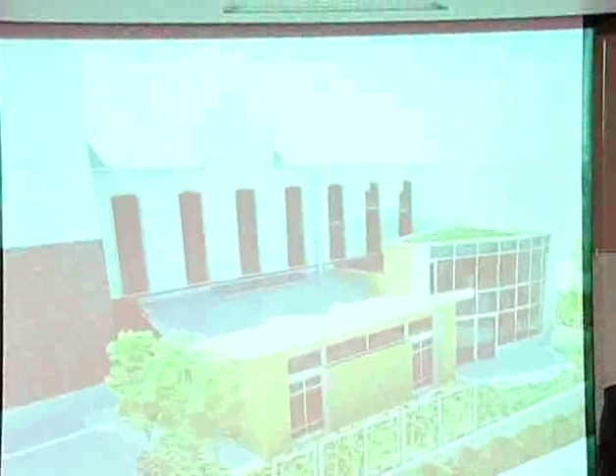So you can see, this is all the north side. You can see how the church building casts quite a shadow on it, and that's in the summer, so it's even stronger in the winter. We're not getting direct sunlight, but we're getting enough light in that space that it's doing what it needs to do. It's nice diffused light.

Good question. Just wanted to clarify.

Once this building goes into operation and you do the monitoring for a year, is there a long-term balanced living building and site management component to this? For instance, when you're cutting vegetative matter out of gardens, or producing trash, or as part of your classroom operations, are all of those things being recycled back into the building and site as part of the long-term management component?

So the question is, after the one-year reporting period, are we still continuing that process, and are we recycling anything the site creates in terms of waste or plant matter we're harvesting back into the building? Yes, the idea is it's about being more than just a one-year reporting period. It's going beyond just the LEED checklist for when you submit it. It's continuing this process—they just make it a year so you can show what you're doing. But the idea is that this building is a living building, producing all of its own necessary things, taking care of all of its own waste, and that's meant to continue through its lifetime.

So the recycling will continue, the use of water and water treatment will continue, the way students use the urban agriculture garden will continue, and I'm sure evolve as well. It's just meant to carry on. I think the good thing about the year-long reporting period is that it's time for them to get used to it, learn how to use it, know that it will work, and then carry on those habits and expand on them.